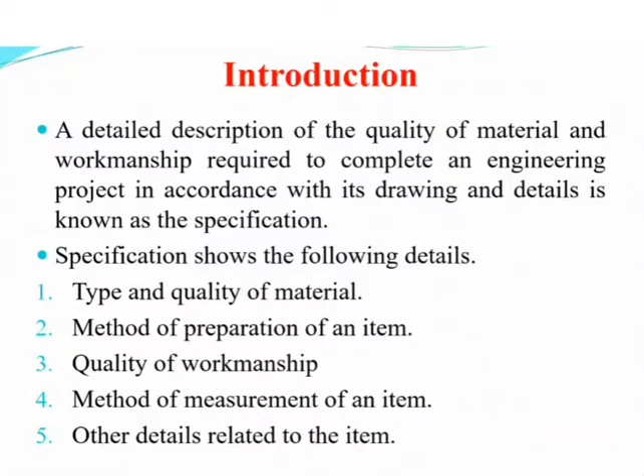Next topic, importance of specification. So, the main reasons why the specification is so important to the construction process. First, sometimes it is not possible to furnish the information on drawing regarding the quality of material, workmanship, and standards which should be applied and achieved during construction. So specification provides clear instruction on the intent, performance and construction of the project.

Second, the rate of item depends on the specification. If the specifications are rigid and demand superior quality, then directly the rate of item will increase, and vice versa. Third, specifications are necessary during supervising the work.

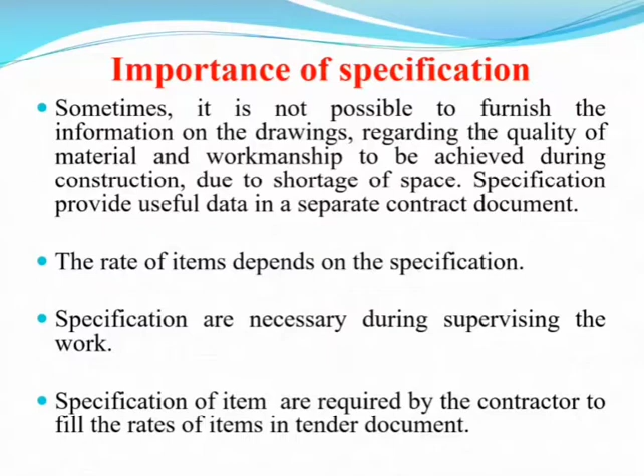Fourth, the specification of items is required by the contractor to fill the rate of items in the tender document. So, as the rate of work is based on the specification, a contractor can calculate the rate of various items of work in the tender with his procurement rate of material and labor. Thus, tender paper without specification of work is baseless, incomplete, and invalid.

Now, next importance: the drawing and specification form two important contract documents. In case of discrepancy between the drawing and specification, the provisions of the specification are given more legal strength and shall govern. Thus, the specification plays an important part in construction work, and heavy responsibility is attached to the specification writer for his job.

Next, specification provides specific guidelines for the workmanship and method of doing work. Thus, it serves as a guideline for supervising staff to execute the work. Now next, specification enables the employer to check the quality of material and workmanship. That means a contractor can make a program to procure the material required for a project, and the owner can check the quality of material as per this specification.

Now last, the contractor bids the tender as per the specification and is paid as per the tender price. Any change in specification directly changes the tender rate. That means the work is carried out according to its specification and the contractor is paid for the same. In any case, the change in specification directly changes the tender rate.

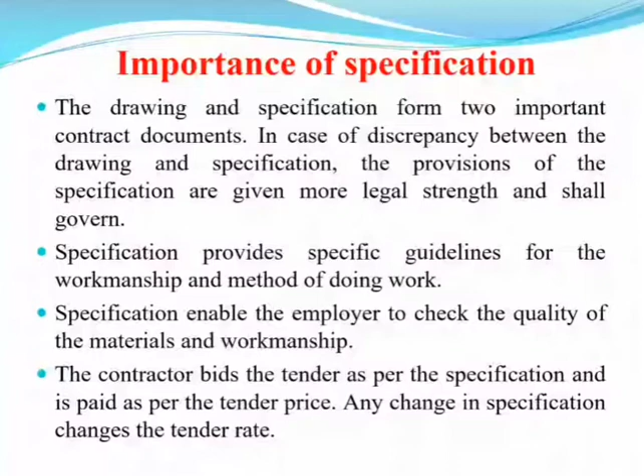Now next topic is purpose of specification. First, to describe the quality of different materials required for construction work. Next, it enables the department, engineer, architect and contractor to procure, define and check the material quality as per the specification. Next, specifications are helpful to the contractor in filling the rate of various items in tender. The contractor who is filling the tender for the work will be able to put the correct rate for the different items of the work.

Next, to specify the quality of workmanship and method of doing the same. Now next, specifications are necessary to verify and check the strength of material for the work. That means the specification of the work is required to describe the quality of different materials required for a construction work and is one of the essential contract documents.

And last, specification is an essential contract document and is required for arbitration and court cases. That means if any dispute arises between the parties, the specification will help the arbitrator or the court to settle the dispute.

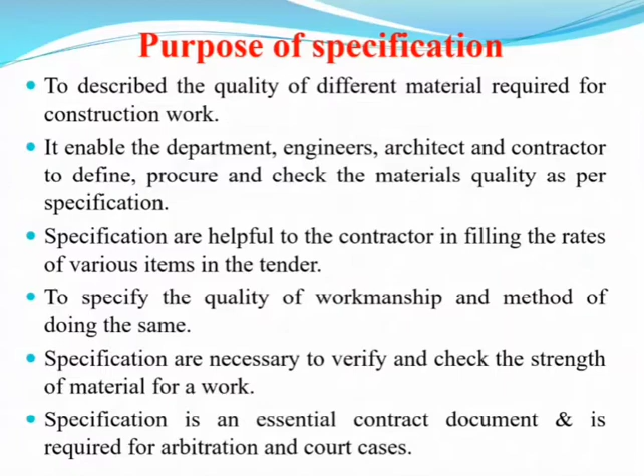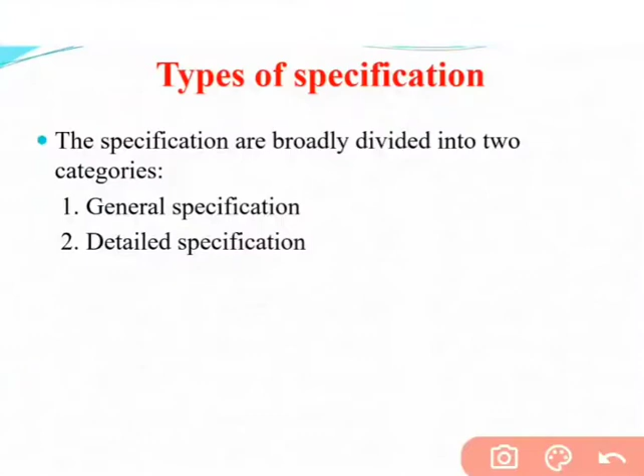Now next topic, types of specification. Specifications are divided into two types: first, general specification, and second, detailed specification. First, general specification. General specification is also known as brief specification. While preparing the estimate, the quantity surveyor writes down a brief description of every item. These are known as brief specifications.

In this specification, the nature and class of work and materials and the proportion that should be used in the various items of the work are described, from foundation to the superstructure. Only a brief description of each and every item is given. It is useful for estimating the project. Without going through lengthy detailed specification, general information for the quantities of materials, nature and class of work can be known from the general specification, but they are not part of the contract document.

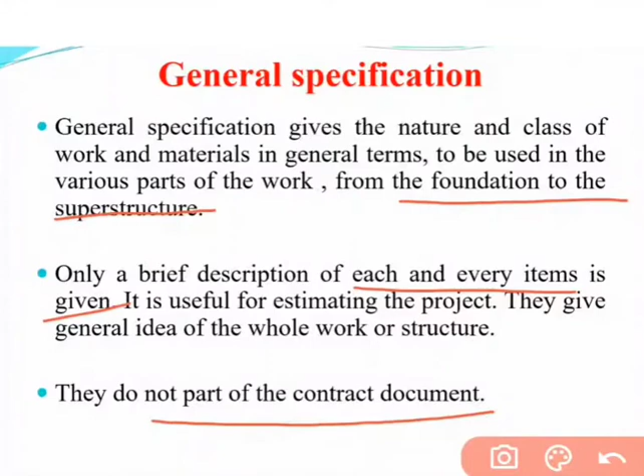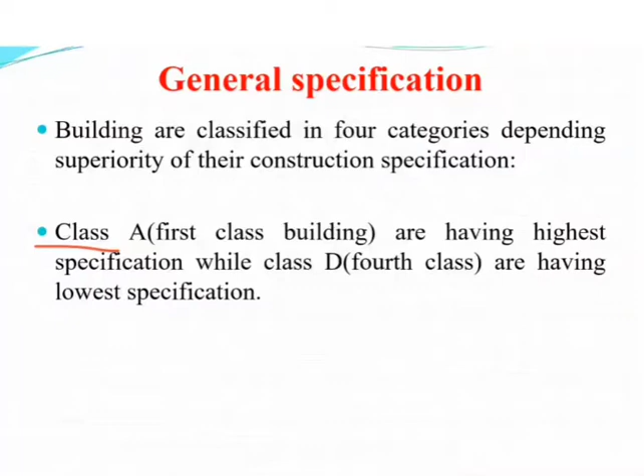Next, buildings are classified into four categories. Class A, that means first class buildings, have the highest specification, while Class D, the fourth category of building, has the lowest specification. So I will discuss first the general specification of a first class building.

First point is foundation and plinth. Foundation and plinth shall be first class brickwork in 1:6 cement mortar over 1:4:8 cement concrete. Second, damp proof course, that means DPC. DPC shall be of 25 mm thick cement concrete in proportion of 1:1.5:3 mixed with 1 kg of any waterproofing material per bag of cement.

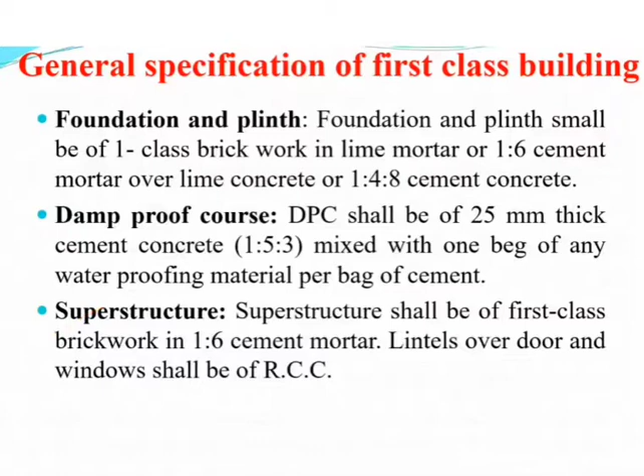Third, superstructure. Superstructure shall be first class brickwork with 1:6 cement mortar. Lintels over doors and windows shall be of RCC. Next, roofing. The roof shall be of 100 mm, that means 10 cm thick RCC slab with 10 cm average thick lime terracing over it. Height of room shall not be less than 3.7 meter. Next, flooring. Mosaic tile flooring shall be provided in all floors including the staircase.

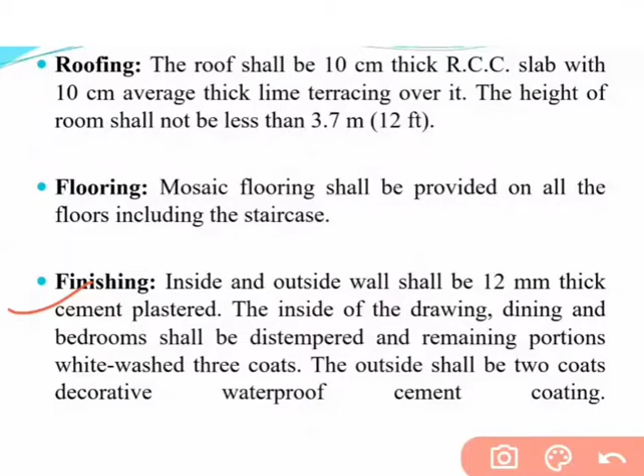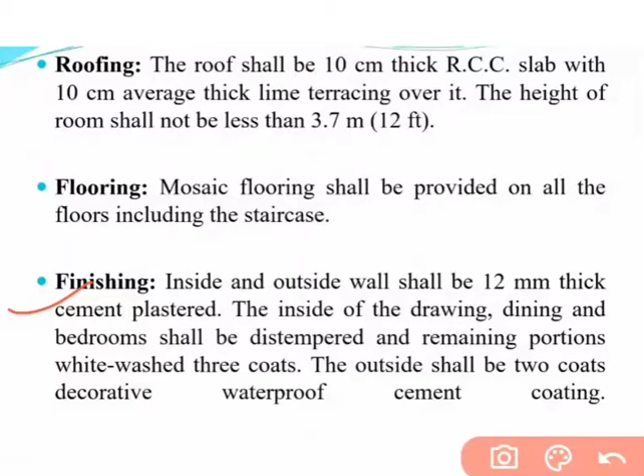Next, finishing. Inside and outside walls shall be finished with 12 mm cement mortar plaster in 1:8 proportion. Inside shall be distempered over 2 coats of whitewash and outside shall be 2 coats of decorative waterproofing cement coating. Next, door and window. Door and window frames shall be of seasoned teak wood, shutters of 3 cm thick teak wood paneling, and brass fittings shall be provided.

All fittings shall be provided with iron grill, and doors and windows shall be varnished and/or painted with 2 coats over priming. And last is miscellaneous, which includes rainwater pipes of cast iron finished with paint. All sanitary, water supply and electrical fittings shall be of first class material.

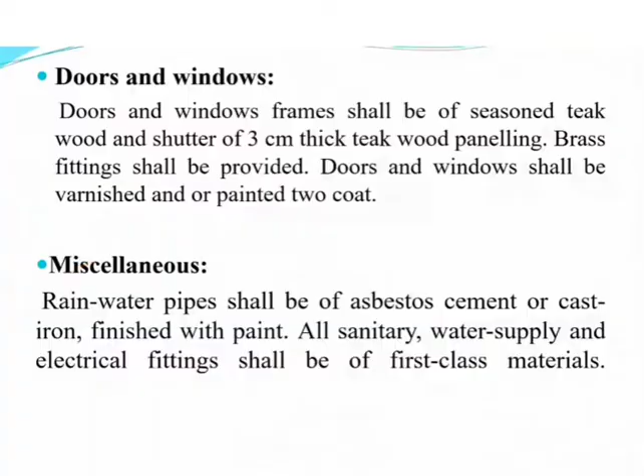Now next, specification of second class building. Specifications of second class buildings are scaled down. For example, in place of first class brickwork, second class brickwork is used. In place of flooring with rich specification, IPS flooring is provided, ordinary plastering on walls, sal wood for doors and windows instead of teak wood. First is foundation and plinth. Foundation and plinth shall be of first class brick with lime mortar over lime concrete. Second, filling. Foundation trenches and plinth shall be filled with earth.

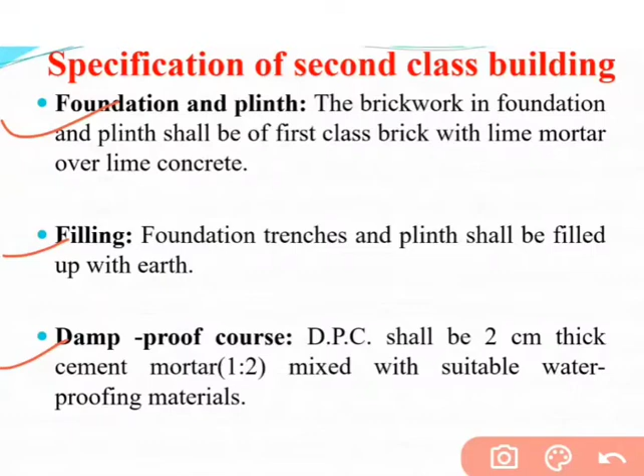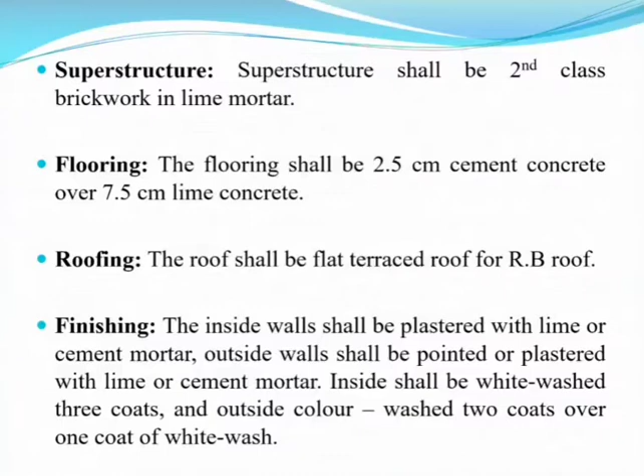Next, DPC, damp proof course. Damp proof course shall be of 2 cm thick cement mortar 1:2 mixed with suitable waterproofing compound as specified. Next, superstructure. Superstructure shall be second class brickwork in lime mortar, and lintels over doors and windows shall be of reinforced brickwork. Next, flooring. 2.5 cm cement concrete over 7.5 cm lime concrete shall be used. Next, roofing. The roof shall be reinforced brickwork slab with 7.5 cm lime concrete terracing over it. Veranda roofs may be of AC sheet.

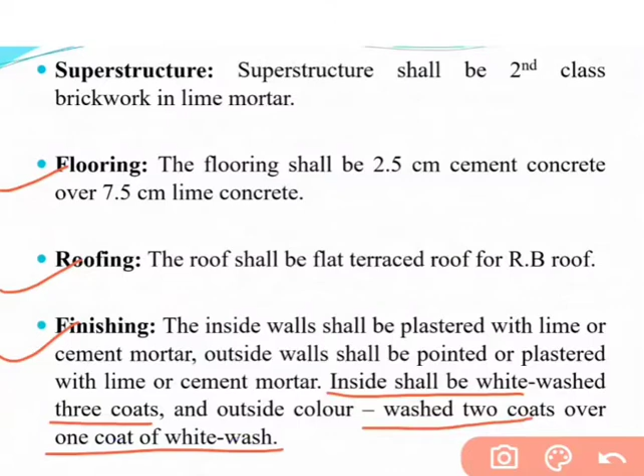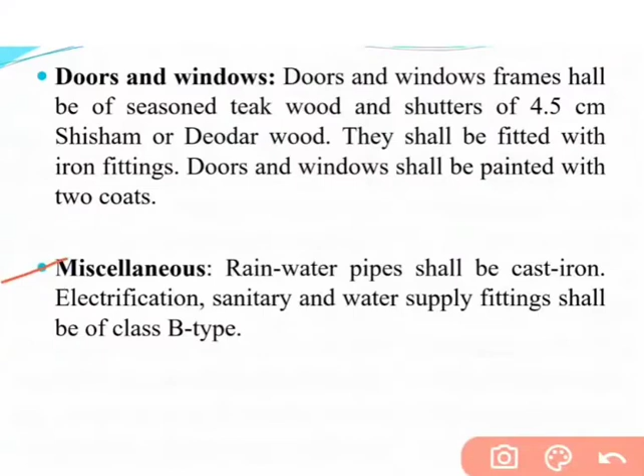Next, finishing. Inside and outside walls shall be 12 mm thick cement mortar plastered. Inside shall be whitewashed 3 coats and outside shall be colour washed 2 coats over 1 coat of whitewash. Next, door and window. Door and window frames shall be of seasoned teak wood and shutters of 4.5 cm Shisham or deodar wood, and iron fittings shall be provided. Doors and windows shall be painted with 2 coats over 1 coat of priming. Last is miscellaneous: rainwater pipes shall be cast iron, and electrification, sanitary and water supply fittings shall be of class B type material.

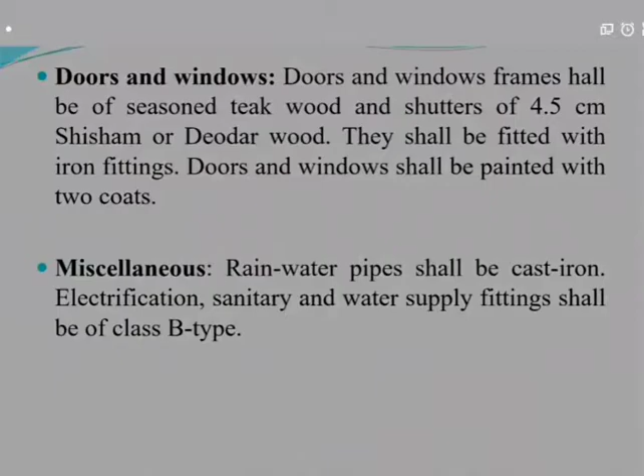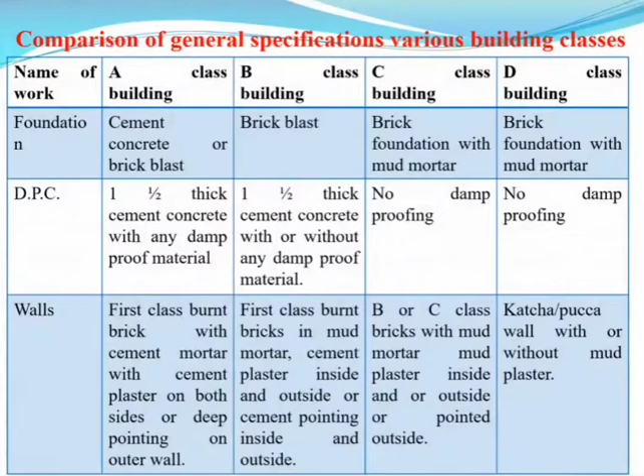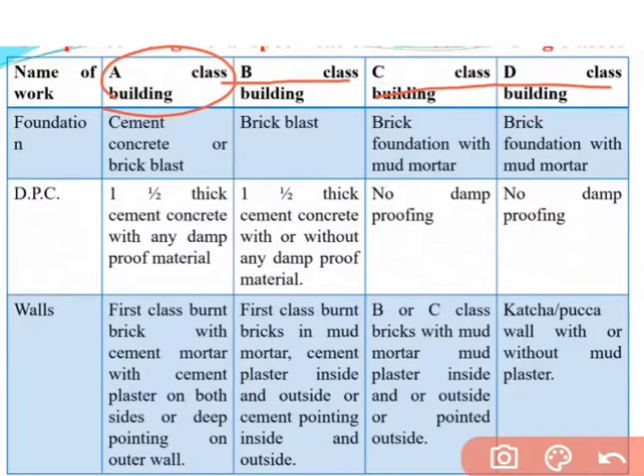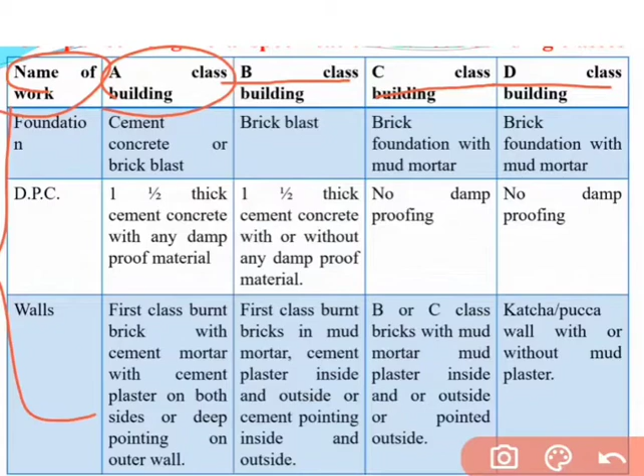Now next, this is the comparison of general specification of various building classes: A class, B class, C class and D class buildings, ranked highest to lowest specification. This column indicates the name of work from foundation to superstructure, which includes DPC, wall, floor, roof, woodwork and fittings.

Now the next topic is detailed specification. The detailed specification for a particular item specifies the qualities, quantities and proportion of the material, the method of preparation and execution, and the mode of measurement for that particular item of work in a project. It also specifies the item of work in detail, accurately and completely in all respects in relation to the drawing of the work.

Next, the detailed specifications of different items of work are prepared separately and describe what the work should be and how it shall be executed and constructed. If any tests are required, like physical, chemical or electrical, for the finished work to ensure the desired strength or quality, they are specified in this specification. Also, the method and duration of protection of the finished work as required are specified in the detailed specification.

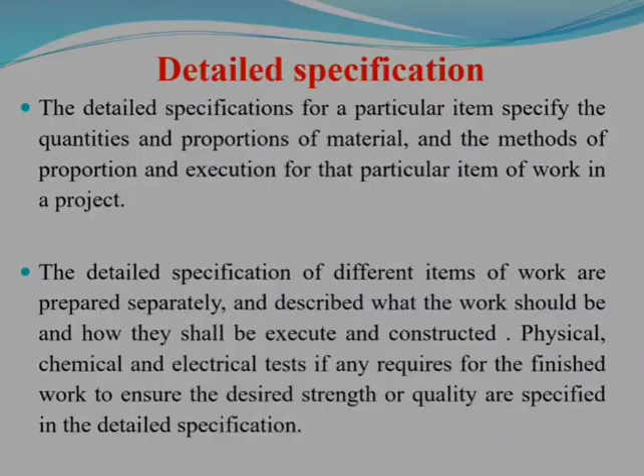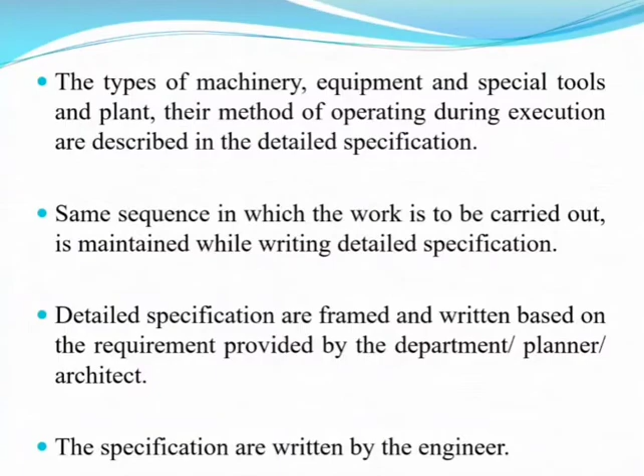Next, the types of machinery, special tools, equipment, plants, and their method of operating during execution are described in the detailed specification. The detailed specifications are arranged in the same sequence of order as the work is carried out. Detailed specifications are framed and written based on the requirements provided by the department, planner and architect. It is part of the contract document, and these specifications are written by the engineer.

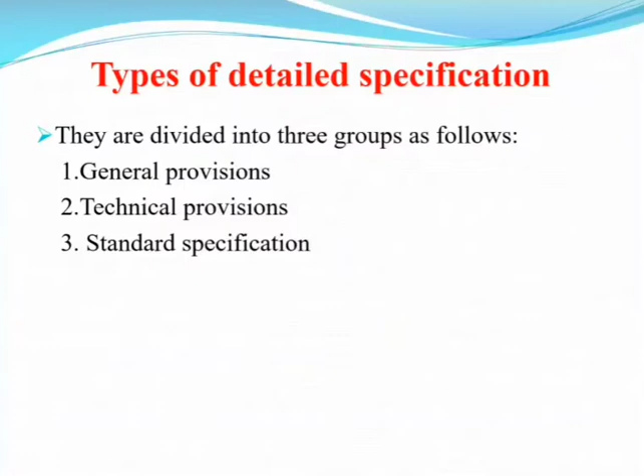Now, let's discuss the types of detailed specification. They are divided into three categories: first, general provision; second, technical provision; and third, standard specification. First, general provision. General provisions are also known as conditions of contract, and the conditions of contract to be included in any particular project will depend on the nature of work. In most civil engineering contracts, the following groups of conditions of contract are generally accommodated.

First, conditions relating to documents, which include the bill of quantities and schedule of prices, drawings, Indian Standard specifications, notices, etc. Second, conditions relating to the general obligations of the contractor, which include access to work, bylaws and regulations, fencing, watching and lighting, instructions of the engineer, insurance, etc.

Third, conditions relating to labor and personnel, which include accidents to workmen, contractor's representative, engineer's representative, first aid, rate of wages, etc. Next, conditions relating to the execution of the work, which involve things like extra items, damages, defective work, defects, etc.

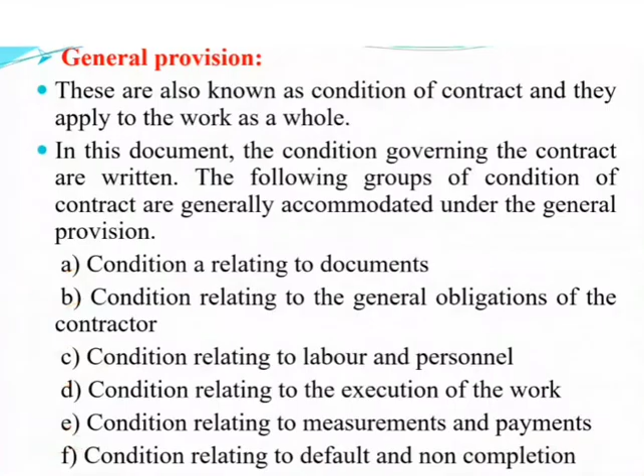The second type is technical provision. This specification describes the technical requirements of each type of construction. Technical provisions contain detailed instructions regarding the desired quality of the final product. They also provide for inspection and tests during construction to make sure that the specified requirements are being obtained. Technical provisions are of three types.

First is specification for material and workmanship. These specifications are written for engineering structures such as bridges, buildings, etc., where it is not possible to conduct any practical test to ensure that the structure will perform its required services throughout its described period of utility.

Second, specification for performance. These specifications are based on the overall performance of the finished product, and hence they are written for equipment and machinery such as pumps, motors, etc. Principal features to be included in this type of specification are a general description, design and installation, provision for special equipment, and guarantees.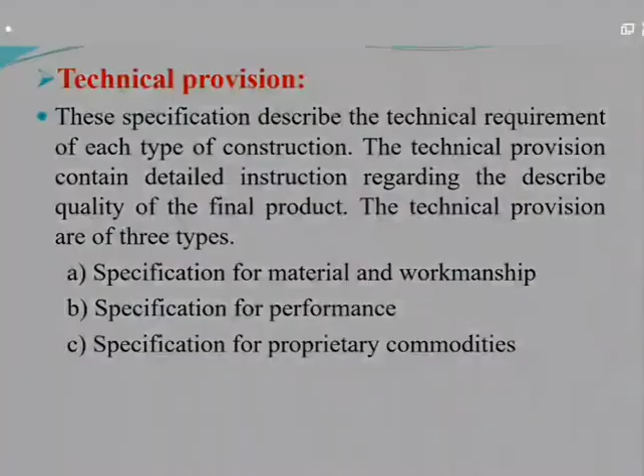Preparing a detailed specification for an item is a time and labor intensive job. Also, there is scope for deviation and omission while writing lengthy specifications. Thus, standardized specifications for most works are prepared by the engineering department, which serve as a standard guideline to the department. These standard specifications are ranked or numbered.

After standardized specification, it is not necessary to write detailed specifications with every contract document. While preparing the contract document, only the serial number of the standard specification is given. Thus, the lengthy process of writing the specification is avoided and much time is saved. Standard specifications are prepared by the government, manufacturers of materials, or professional bodies.